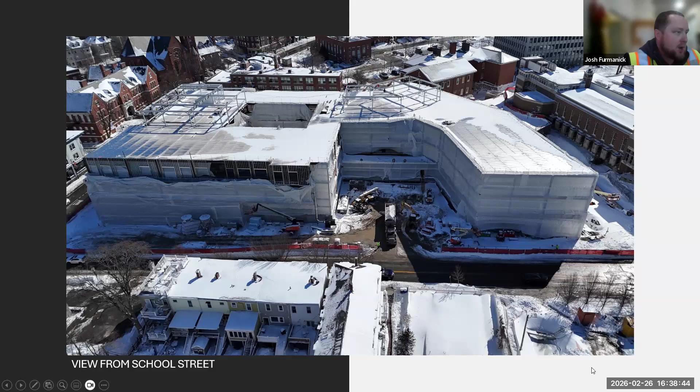Over at the park, right now we're still drilling, working on 3-1 and 4-1, which are on the upper side closest to the apartments. Then the crews will come over to the other side of the Tannery Brook, basically working 7 and 8 line. We have 22 wells left to drill, looking to wrap those up at the end of March. After that, when we have a good break in the weather, we'll start going after the excavation of the geothermal vault itself, and start doing all the branch lines connecting everything, then bring the park back to shape.

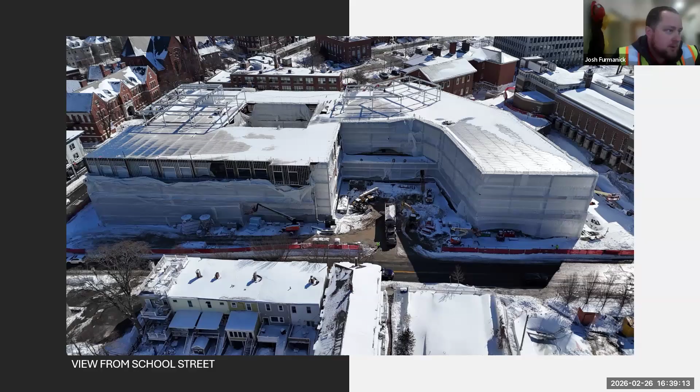So that's still on track, looking good over there. Obviously fighting weather, but they're doing good with all their drilling right now. So that's kind of the overall schedule where we stand right now within the project—snow's been the fight, but we're working through it.

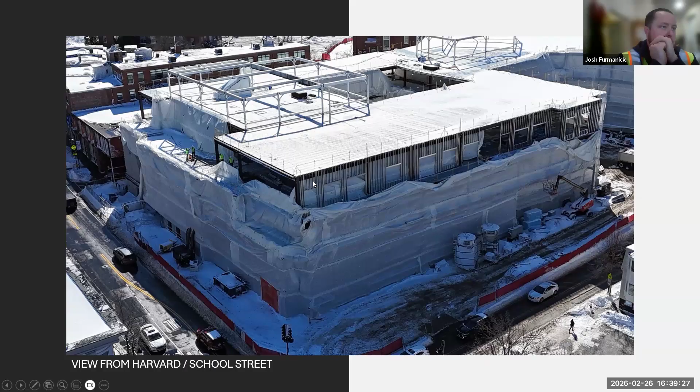We'll flip through some photos now, just to show status. So this is a view from the corner of School and Harvard Street—that's the north and west elevation of the building. Just Harvard Street, a view of Harvard Street.

Steve, you have a question? Yeah, quick question—back when you were talking about the geothermal work in the park, did I hear you say something about working on the other side of the Tannery Brook? Correct, yep. Is there an underground stream under that park?

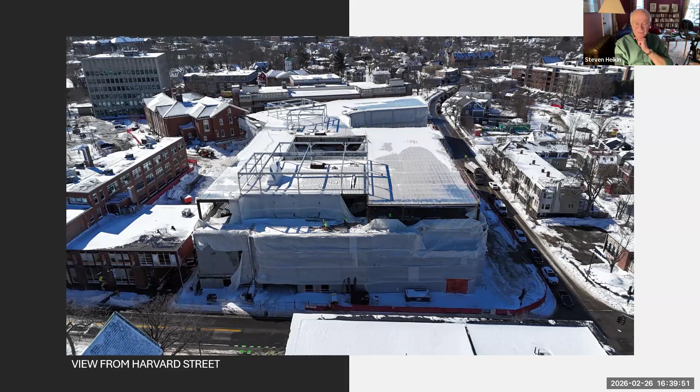Yeah, there's a 60-inch culvert, basically 18 feet down, that runs right through the park. I did not know that. Yeah, it's pretty old—we've been aware of it for a long time, Steve. It's been there since the 20s, I think. We surveyed it to make sure we understood the existing condition, and we have kind of a no-fly zone as we install around it because we don't want to disturb it. So we've been very aware of it, protecting it, monitoring it.

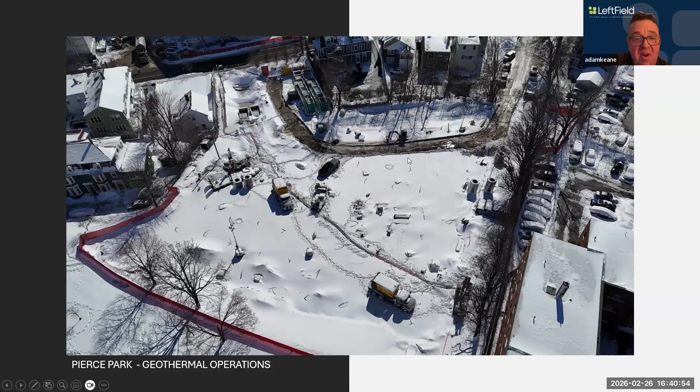The name also caught my ear because in my career as an architect I did some work in Peabody—there's a Tannery Pond and Tannery Brook up there, and there were tanneries in Peabody. Is there a tannery around here that gave the brook its name? Maybe in the 20s. Oh geez, it's been a while, yeah. But it's a brick culvert, and we've been very careful with it for obvious reasons. Understood, all right, thanks for the info.

So that's just the current state of the well field. As you can see on the right side of the screen, there's drilling happening on that upper bench right now, and they'll be working down near that smaller excavator, basically shrinking the site tighter and tighter. It's going to be tight down on 7 and 8 line.

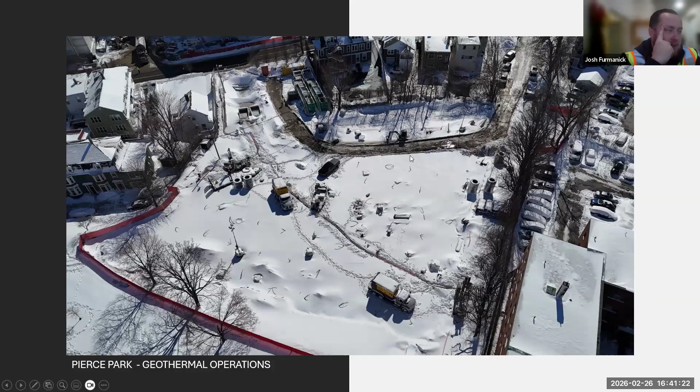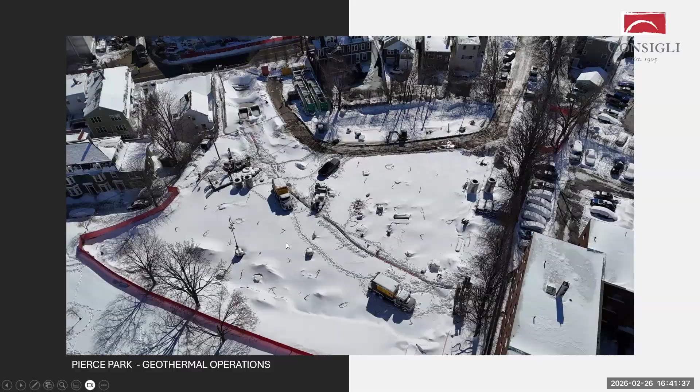Work continues over there, and they're down to one rig on that side because of site constraints. Each of these little things sticking out of the snow is a well. As you can see, all of these jumping out of the snow are the wells we have there. In the last slide, we mentioned we have 58 drilled right now, so we have 22 left to go.

The branch lines he was talking about are actually the lines between each of those dots, for those who would like to know. Has there been any problems with the drills or drilling?

With drilling, nope, we've been drilling right through the winter. That's great to hear. We have a delay here and there just because of weather conditions, for routing.

I meant with breaking a drill bit or anything like that. Nope. I think for the most part we had one case of communication between two wells, where the wells essentially almost hit each other. It's nothing to necessarily be concerned about, they take those calculations into account. But if there was a concern that a well is specifically 100 feet shorter than the others, we would put a new well in if needed to make up that difference. Just to keep you aware, it's nothing to be nervous about.

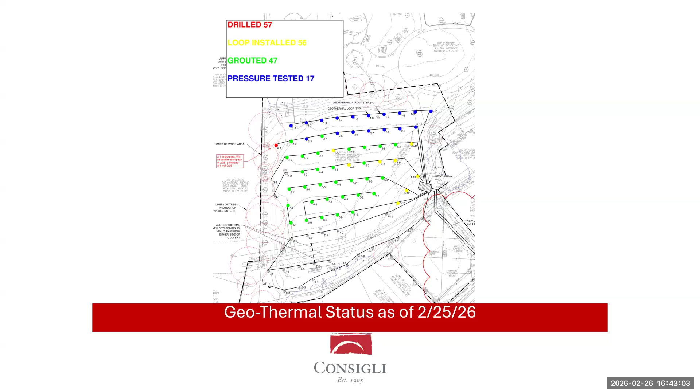One of the things we also encountered when drilling is a fracture zone, basically a little crack in the earth about 400 feet down. Other than that, nothing major, but good things to note. Thank you.

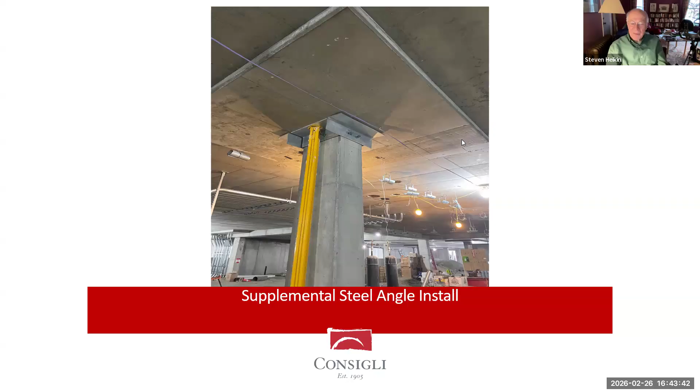Steve, did you have another question? Oh sorry, I didn't mean to raise my hand, but I do have another question, totally unrelated topic. I just remembered I got a message from Sergio Modigliani, who's been on many boards about town, including the advisory committee and select board. He asked me, and I didn't know the answer, whether electrical demand side management is part of the Pierce electrical system design. Maybe somewhat out of order from your presentation, but I'll put that out there. I don't know if other people were made aware of that, or maybe Carol Levin was also queried about it. Anyway, I didn't have an answer for him.

I know a little bit about that. I think there's a couple ways of doing that, if I'm understanding you correctly. It's like load shedding, and it can also be done with batteries. I know it comes up when providing parking areas for large numbers of cars with EV hookups, where they can't all be powered up at the same time. So that's one aspect of it, but I think he's talking about the bigger picture for the entire project.

I can talk a little bit about this. It's really more of an operations thing because we don't have batteries. Eventually we'll have solar panels here, but as of now we don't. What we do is if we have brownout conditions, or when Eversource says we're running short on electricity, Charlie will raise the temperature in the schools so they use less electricity and we shed some load. We don't have battery storage, so we can't do that with the EV stations unless someone's hooked up, we don't have backfeed to the grid on the EV stations though. Eventually, with solar panels, we'll be able to backfeed into the grid if needed.

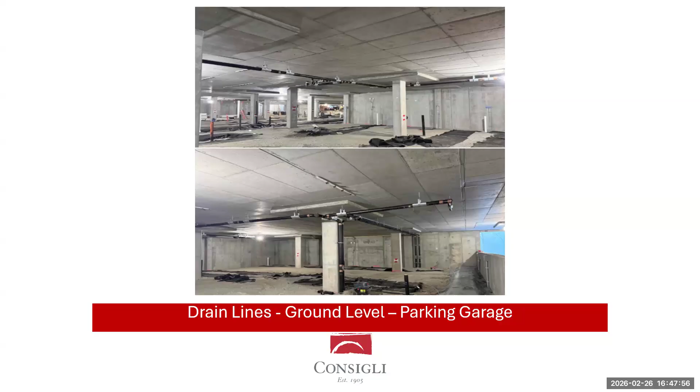All right, Josh, you want to keep going? Yeah, so this is the current state down in the garage right now.

Basically working on our shallow levels, as you can see in those lower photos. The black is all the subslab drainage, and we're starting some overhead pipe as well. Bottom photo is building A, top photo is kind of the blend between building A and building B.

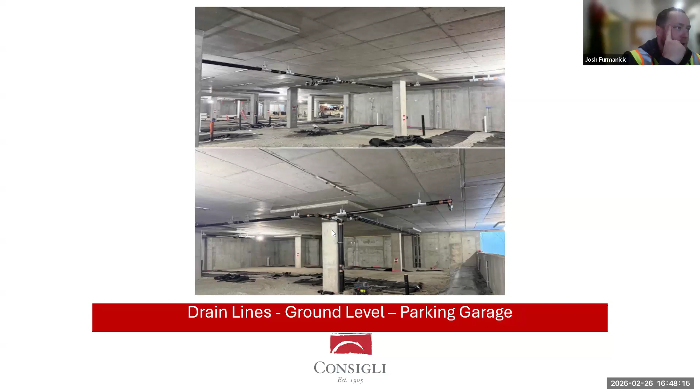Just the process of what we've got to do. We got some frost down there, so we had to do a ground thaw. Unthawing the ground, it's in good shape now, but that's just what we have to do to dig during the winter. So just an updated look at that process.

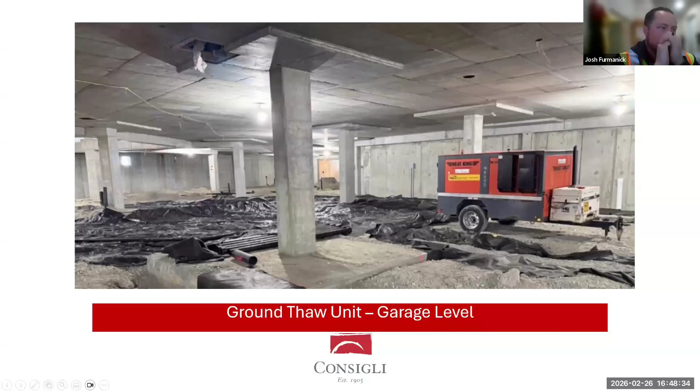Same thing, just the underground process. This is the curbs down in building A, just the current status of those, with the curbs done and all the vapor barrier on it.

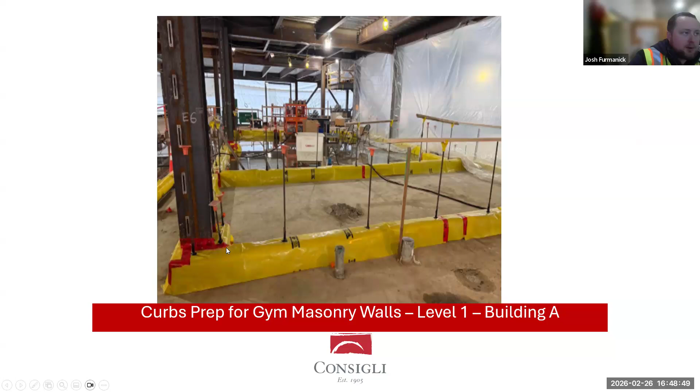And then this is a view of the small gym. That's the exterior shear wall right there going up. They grouted today, and they'll be topping off tomorrow. Then the other one is the G-line, which separates the multi-purpose room and the large gym.

And again, you'll notice that we put some additional tarping inside this gym area as well to maintain the heat in those rooms for additional quality.

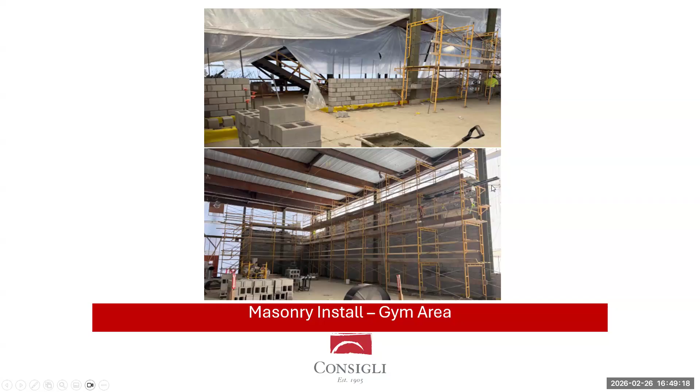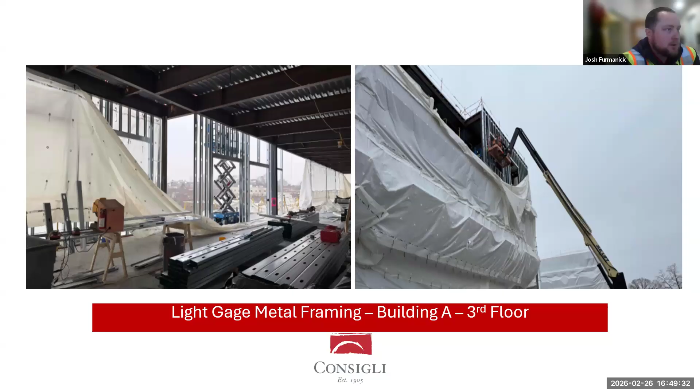That is the east elevation complete. We actually went for a sign-off last week with the building inspector. All looked good, so we'll just continue that process throughout the rest of the building.

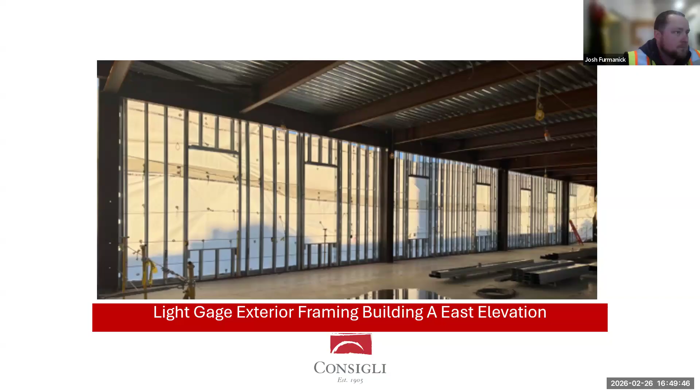And then just the roof access stair, another point of access going up into the building. That's installed right now. We've got some work to add into this stair, but once we do that, we'll go after placement. That'll help with overall access up into the roof level and make it safe for all the workers when we start doing the roof. We're targeting doing the roof late March, early April to drive toward that weather-tight date on July 3rd.

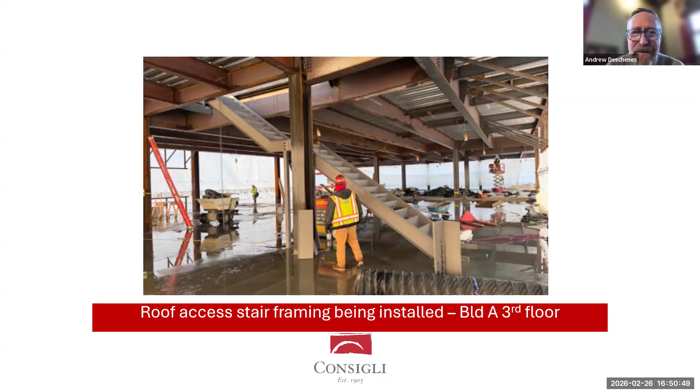One quick question, because it came up at Driscoll after the fact: is there a lock or some way to secure the access to the roof? Yes, there's a doorway that locks. There's a specific room that provides access to this stair, Helen, so it's not part of another stair like at Driscoll - it's very different, and intentionally so. Just wanted to make sure. Thank you - once again, the design team took all the notes and did the right thing.

And then this is inside the historic building - just the process. We got the new column up, installed, and welded. So we started the process of removing the temp shoring, and that's all down at this point. The crew actually started excavation today for the elevator pit.

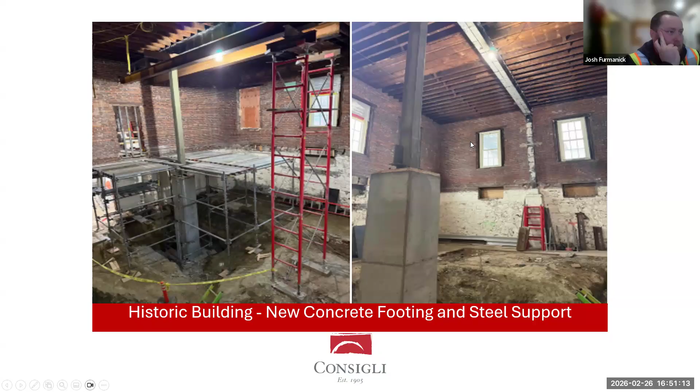We install this wall so that we have a smooth surface to apply new waterproofing to, because originally you can't go to the rubble foundation and the brick. So we install this flat surface with concrete so that we have the ability to then install the waterproofing. How thick is that wall?

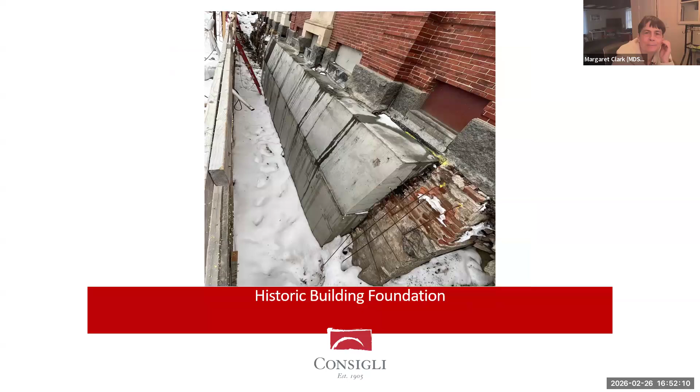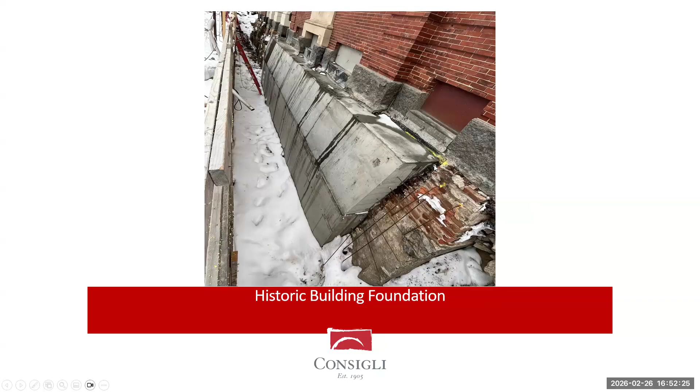That's fairly thick on that side there. It's 4 inches thick minimum, but because of the irregularity of that face, it's much thicker. So 4 inches at its smallest point, which is right here, and then because it goes in and out, we didn't want to have to jump in and out because that just creates more cracks. Creating a flat surface looks thicker - yeah, definitely thicker. We're exceeding the minimum.

So this is the mud mat on the backside at the addition. First process, first pour. So we got this down. Crew started the footing where all those guys are on the lower photo. This is actually during placement.

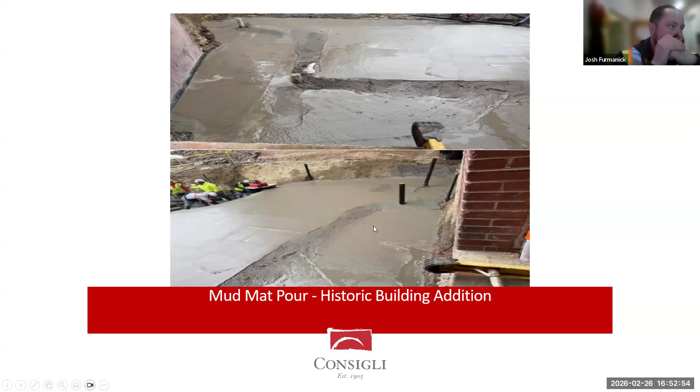Now that's cured, they're out there forming the footing, and then we'll start with our first layer of waterproofing going across this whole thing. As Josh mentioned, this was big for us to get before the storm, so it was easier to get all the snow out of this area as well. So this was a big pour for us.

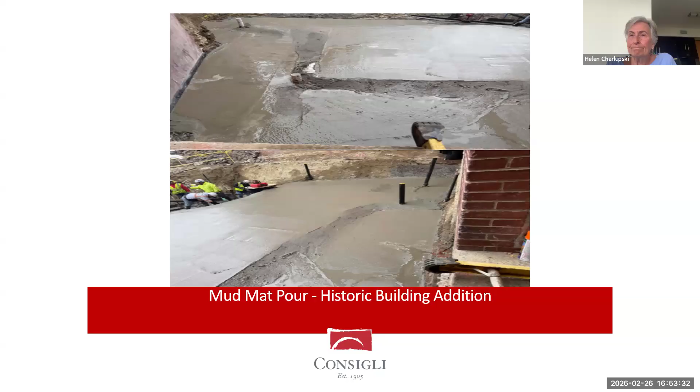Hello everyone. So our budget remains the same at $211,915,958. We have expended $60,918,082 to date. Of that, we have a remaining $150,997,876 to spend.

In terms of our contingency status, we have not spent any of our GMP contingency nor our owner's construction contingency. To date, we have expended $592,952 of the owner's soft cost contingency. This leaves us with a remaining contingency balance of $12,738,510, and we are approximately 30% complete with construction.

So our cash flow, it is a bigger delta than what we had originally projected in terms of actual expenditure, and a lot of this has to do with weather and the final billings of structural steel not being in at the time of reporting.